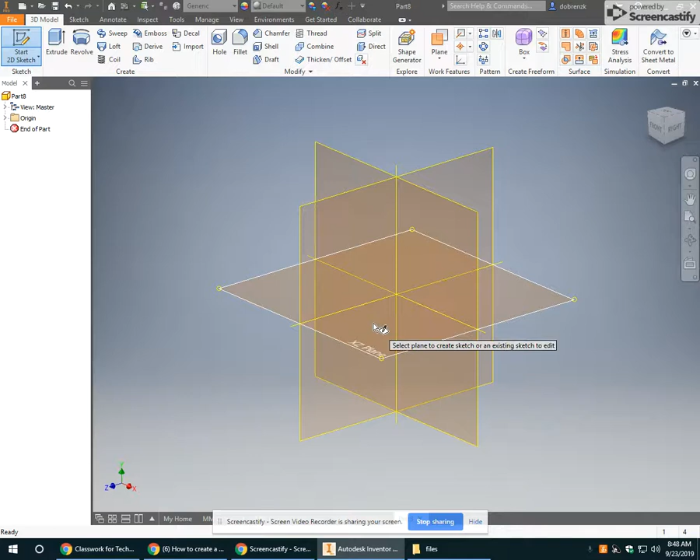First thing we're going to do is open a new part. And then I'm going to start a 2D sketch. Everything starts with 2D sketches. Now, I have several planes I can start with, but I just want to make it look like the picture, so I'm going to start with this plane. I'm going to grab the line tool. It's the most basic tool. I'm just going to start out with that.

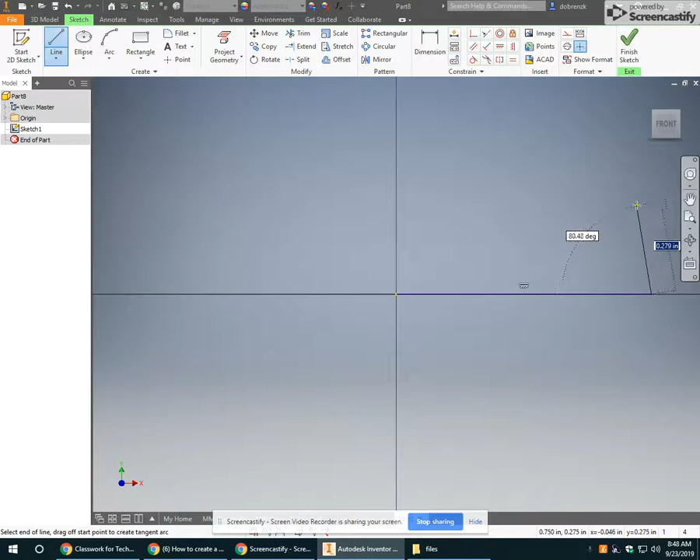And I'm going to start at a corner. I'm going to put that corner right on that origin, the center point. You see how it pops up green? That's a good thing. That means it kind of anchors it to that spot and it saves me work later. So I'm not paying attention to the dimensions. All I'm paying attention to is that my lines are straight, because I know those lines are all vertical and horizontal. So you see how it snaps? Like if I'm going close, it snaps at the vertical. That's a good thing.

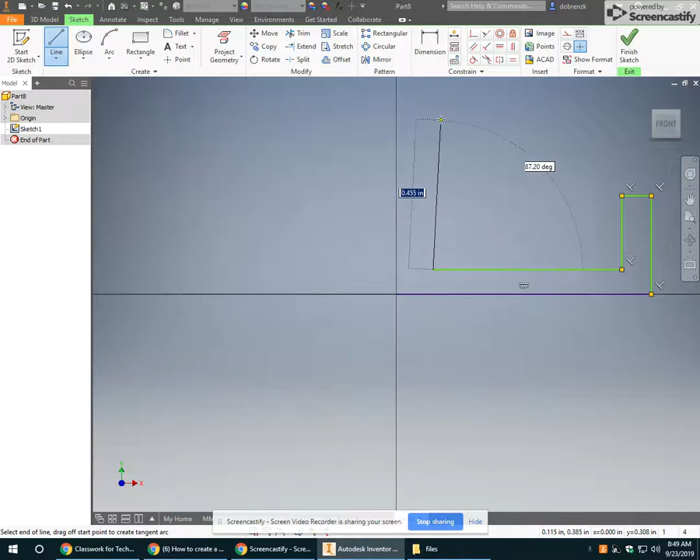I'm just going to try and keep everything at a right angle, not worry about dimensions, and just get the overall shape. One thing I want you to notice is when I get close to the height of the other side, it wants to snap to it. I have to be careful with that. If they're the same height, then that's okay, but rarely are they the same height in our exercises, so exaggerate the difference. And it's hard to see there because it's on the axis, but there is a dotted line going up and down. All right. So this is approximately the shape, correct?

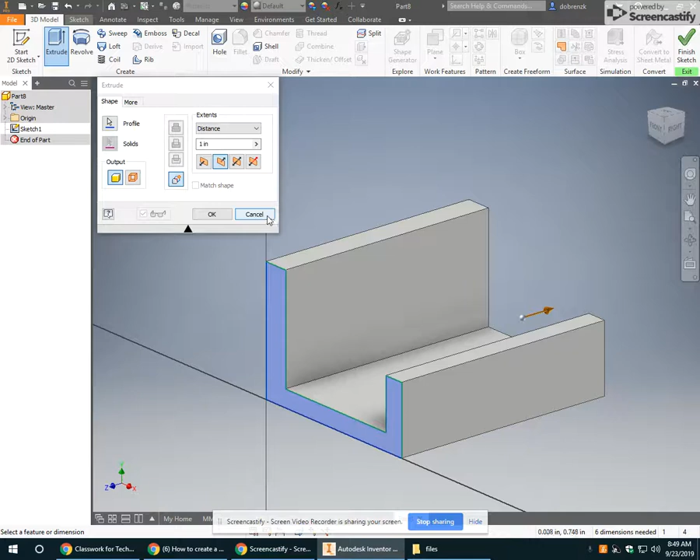Okay, so if I model that, getting it to go the right way, is that the approximate shape that we're supposed to be looking for? No? You gotta change it like the sides. Approximately, though? Not perfect, but approximately. Yeah. I think so, too. So that's good. So we're on the right track. So I'm going to cancel that out. We're going to go back in here and start putting in our dimensions, all right?

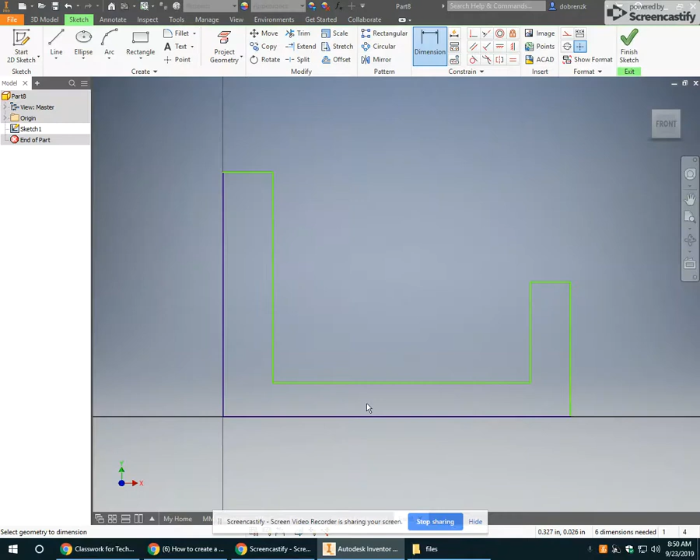So let me grab the dimensioning tool under the sketch tab and then refer back and start getting these dimensions. So I know my biggest, longest side is 3 inches here. I have 1.5 inches on height on this side and 0.750 on this side. So I'm going to put all those in. So that was 3.0. And it looks goofy, but that's okay. As you put stuff in, it'll start making sense. And this was 0.75.

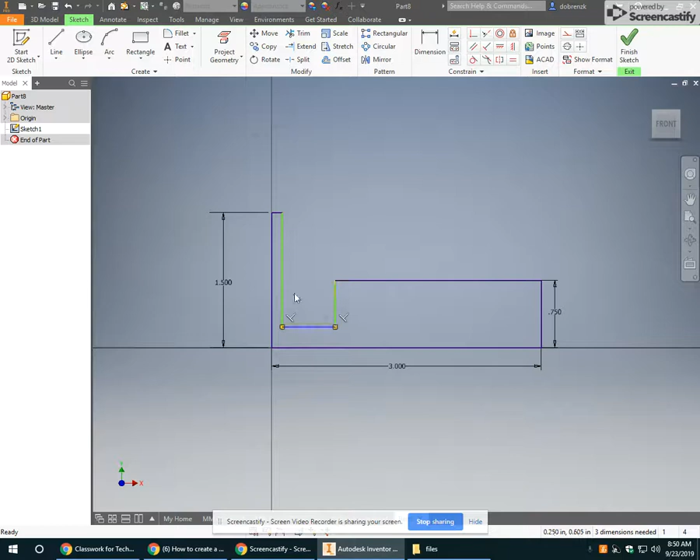Okay. Now, if you're too worried about it looking goofy, you can grab the green sides and move them around. So if it's green, it doesn't know what it's supposed to be yet, so it'll let you move it around. But I can't move around things that are purple or fully constrained. Only if it's green, right? Only if it's green, you can move it around. So if I look at the thickness of this piece, it's 0.250. This side's also 0.250, and the bottom, it's also 0.250.

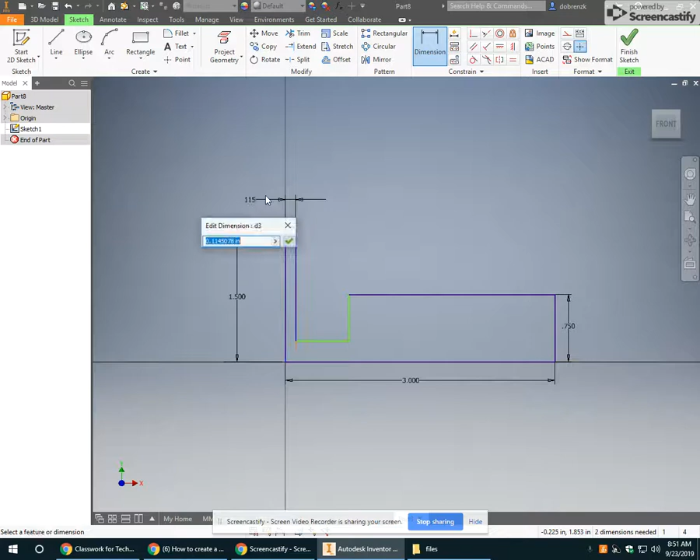So if I just put those in there, I'll go grab my dimension tool. So this is 0.25. This is 0.25. And from here to here is also 0.25. Now, does that look a little bit more accurate? Yeah. And if you look down here, it says fully constrained, and that's always what I'm looking for. I want everything purple, and I want this to say fully constrained. And the way I can check later is, you see this push pin over on the left? That push pin, if I hover over it, tells me fully constrained.

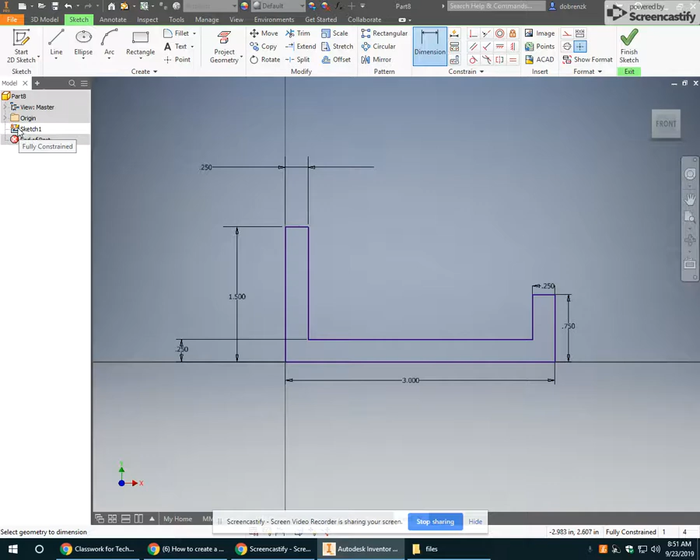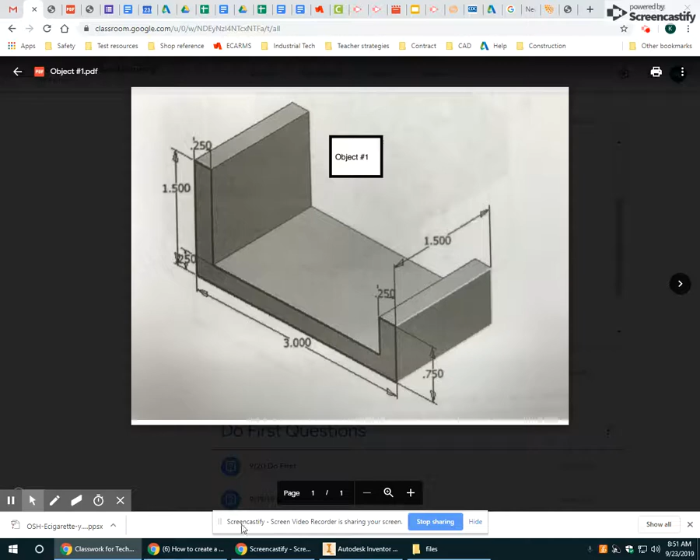That's a good thing. Right, now, to make something 3-dimensional, we use one of the features, which in our case, for a while, it's going to be the extrude. And it opens up this box. Let me just make sure my distance is correct per the drawing, which here is 1.5. That's my 1 dimension for that 3rd-dimensional extrusion. 1.5. And you can go either way or split the difference. And in this way, we know that the drawing is in the front, so we want it to extrude out of the back. And I say OK.

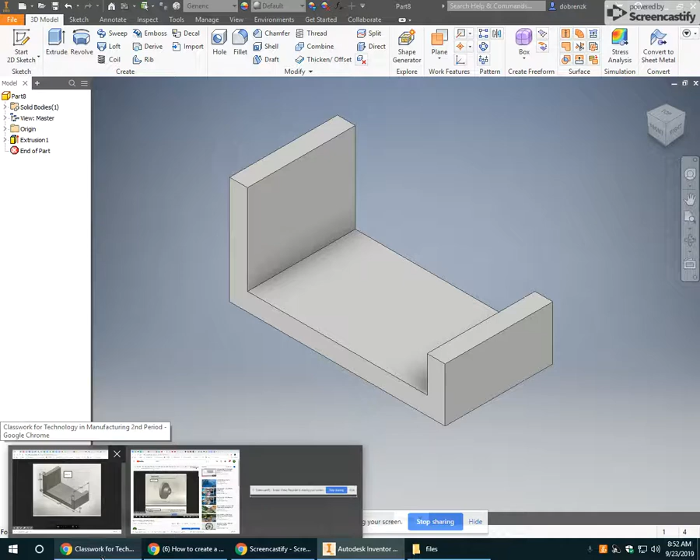Does that look about right? Yeah. Okay, that's all we're doing. Everything's going to get a little more complex with each of the objects, but that's essentially the same steps we're going to follow for everything. Okay?